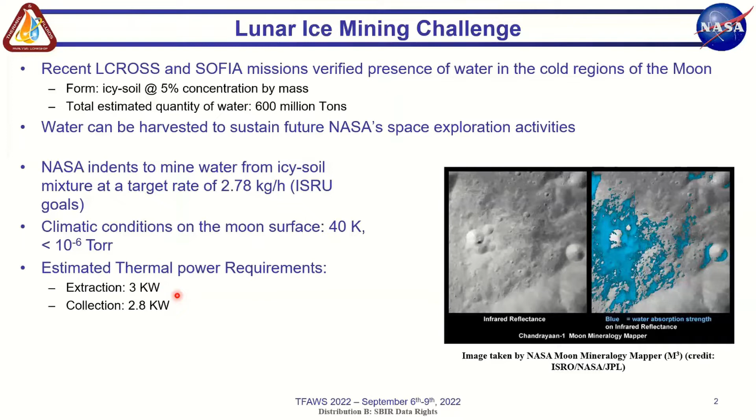And for collection, we basically have to recondense the vapor back into ice on the collection side. So we'll have to reject 2.8 kilowatts of power there. So we are working with our collaborators, Honeybee Robotics, in developing this entire thermal management system for volatile extraction and collection. So volatile here in this particular project is basically ice.

So here you see with this particular flow process, different thermal management components, which will be assembled together for the final test. So we have the mechanical pumped fluid loop, single phase in nature. It connects the waste heat source like an MMRTG and delivers heat to one of the main components, which is the thermal corer. And the entire presentation is actually around the thermal corer here. So the thermal corer is basically used for ice extraction.

It basically has mini channels on the drill auger. And we have a rotary union, which facilitates the fluid loop between a stationary component here and a rotating component like the corer. And later on, we'll be developing a VCHP integrated cold trap tank, and that's basically for the volatile ice collection, so to speak.

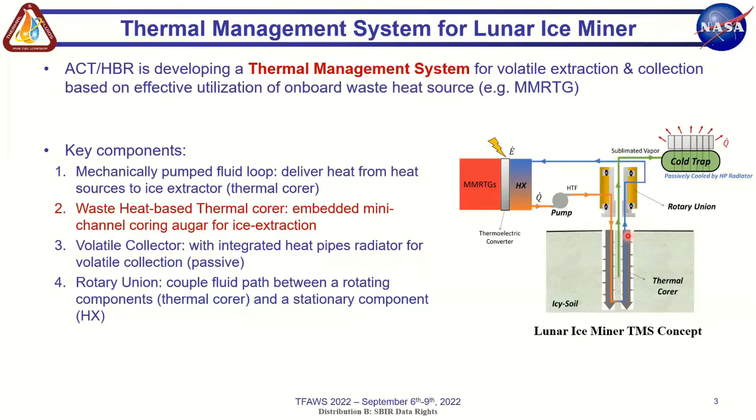So this is just a schematic representation of how we would envision the entire thermal management system to be on a vehicle here. So we have the corers here, power source connected to the battery. So this is our electrical supply, and then we have the VCHP radiator panels for heat rejection to the sky, by radiation, basically.

And so for one particular vehicle, we have some preliminary calculations, which were done in phase 1. So we're looking at 60 kgs of entire system weight, including the batteries and the power source, 0.33 kilograms per hour of ice mining rate, and then we have this particular thermal and electrical energy demand.

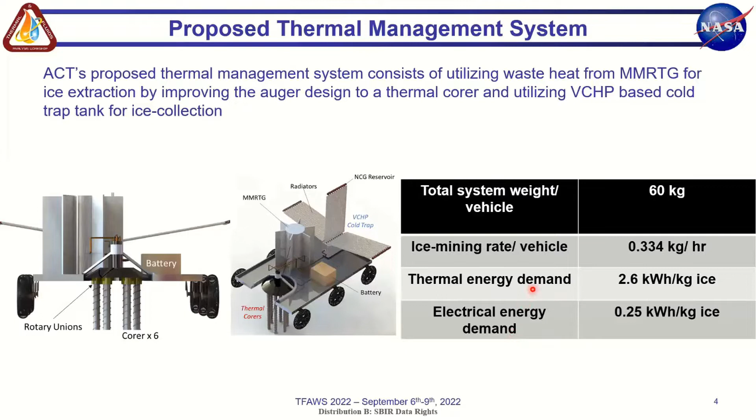So we'll come to the crux of this presentation, which is looking at the thermal corer for ice extraction. The thermal corer is an improvement on the PVEx drill. The PVEx drill was the original concept, which was developed by our collaborators, Honeybee Robotics, for ice extraction. So just for the sake of convention, I'll call the PVEx drill a standard corer here, which is this particular figure. So you have a drill auger with an internal capture volume.

So the water ice regolith, which fills this capture volume, is heated up, and that's where the sublimation occurs, and the sublimated vapor is captured. So a standard prototype, which was demonstrated, and which we will consider for the sake of this presentation as the state of the art, is about 5 centimeters in ID and 50 centimeters long. And so it has 1000 cc of internal capture volume.

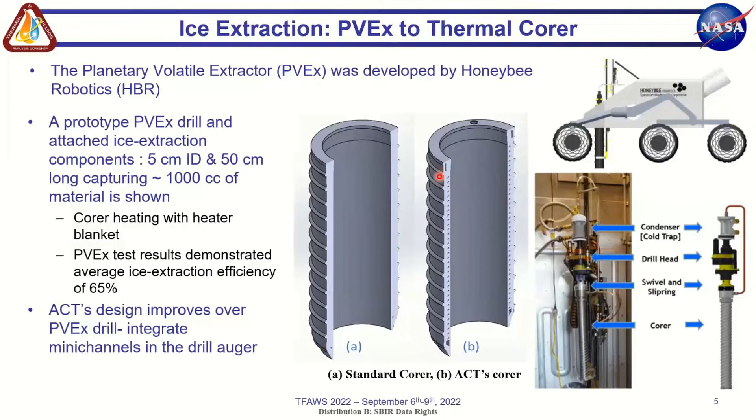And in their experiments, they actually used a heater blanket for sublimation, and saw up to 65% ice extraction efficiency. So where our innovation comes into the picture is basically integrating mini channels into the standard corer, and we'll call this the thermal corer here.

So the thermal corer with mini channels for fluid flow for ice extraction. We'll have the hot fluid inlet and the cold fluid outlet at the top of the manifold. The hot fluid coming in distributes into four channels, separated out, and spirals downwards. It converges at the bottom manifold and then flows through the annular space outside and then flows outwards from the top of the manifold again.

So here's a schematic, this is the thermal corer that was 3D printed. This one is 5 centimeter ID, but 17 centimeter for the demonstration purposes. Another schematic laying out the same, the hot fluid representation in red. We'll have the hot fluid flowing close to the inside captured volume, because we want the majority of the heat transfer occurring to the inside of the corer for the sublimation of regolith.

And so the hot channels, you see the channel size increases in aspect ratio as it flows down. And then at the bottom, it finally converges, and then it flows outwards. The cold fluid flows outwards, more closer to the outside of the corer. And then we have the cold fluid flowing outwards completely.

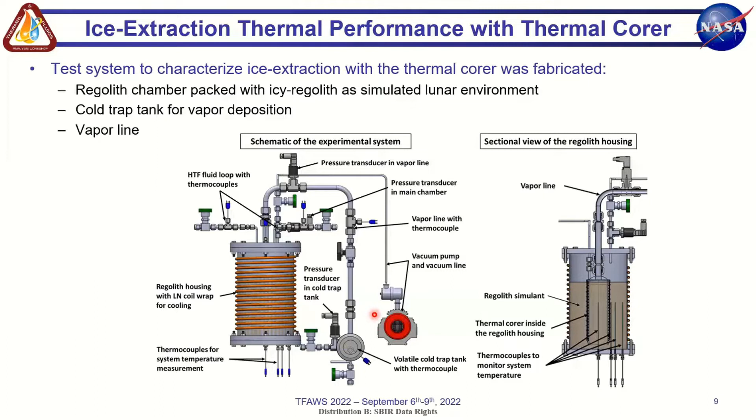So a couple of sets of experiments we did. We basically are maintaining the initial and the cold wall on the regolith chamber at minus 20 degrees C, and we are pulling down the vacuum to around 10^-3 torr. The cold trap tank we are maintaining at a touch lower temperature, at minus 50 C, just to have that ice deposition happening there.

So one set of experiments where we have heat transfer fluid at 50 degrees C. We are using ethylene glycol 60% volume as the heat transfer fluid. And the reason is we don't want the residual fluid in the thermal core to freeze when we are cooling down the whole system to minus 20 C or below. So in this case, we have about 25% of ice extraction.

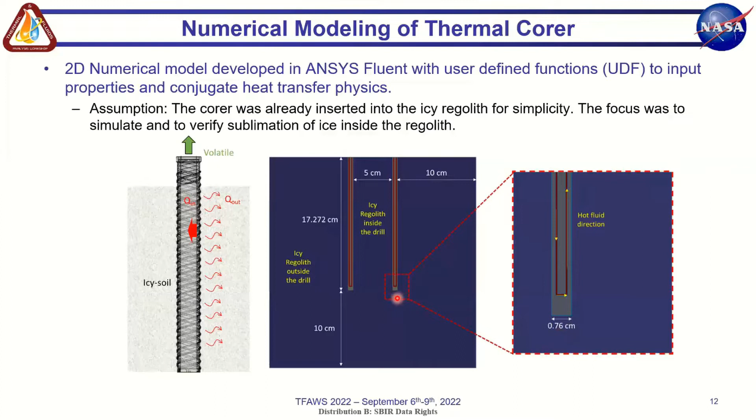As the hot fluid flows through the mini channels in the thermal core, we start increasing the temperature of the regolith, which is captured inside. And that changes the saturation pressure of the fluid, which is water in our case. And that also changes properties like the specific heat and the thermal conductivity, which are a function of the ice fraction available, the temperature, local pressure, porosity, etc.

And so we are essentially solving the entire energy and fluid flow equation from the heat transfer fluid to finally determine the temperature distribution and ice mass fraction left in the captured volume. The essential difference between the initial and the final fraction left will be the amount of ice that is extracted. Other internal calculations will be the specific heat capacity of the regolith and the thermal conductivity of the mixture.

So some initial conditions we had with the numerical model: we had a mean fluid temperature of 42 degrees C, which was essentially the average temperature of the fluid going into the thermal core. And a back pressure of 3000 pascals, which is the resisting average pressure from the cold trap tank, which we actually observed during the experiments.

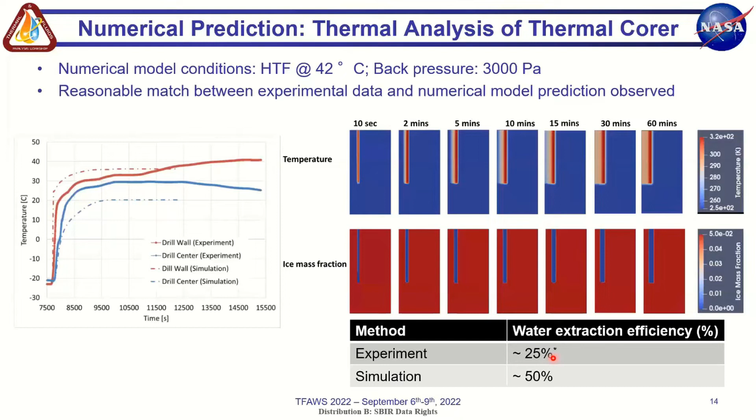And the reason why I say more than 55% is we noticed that there is some amount of residual water which we were not able to extract when we were putting it in the measuring flask. So we're still figuring out ways to capture the entire volume for a clearer number.

And the other aspect here is, initially when we insert the corer in the pre-packed sand, we're going with the assumption that the sand flows without any resistance into the thermal corer volume. But again, we want to do some simple experiments to see if we are actually filling the entire volume inside the corer, or if there is a small fraction of space that is still left in the corer.

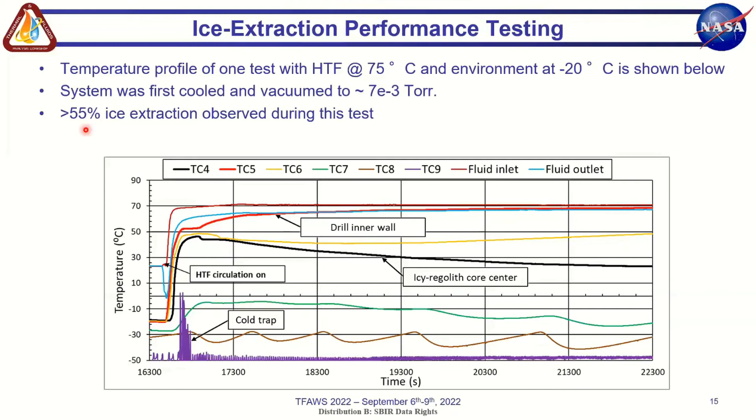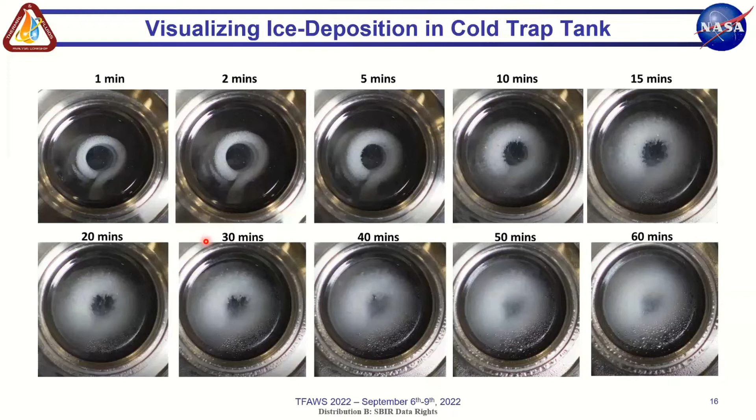So going forward, we are still doing more tests to find the optimum parameters for this particular prototype, and then have the numerical model come in handy so that we can use it to find the more optimum geometry and the optimum operating parameters for ice extraction here.

Soon we'll be delving into the VCHP radiator cold trap tank. We already have good experience with the VCHP radiators, and with the cold trap tank we have a good amount of information from this particular test with the proxy cold trap tank. So we are quite comfortable finishing this effort quickly. And then soon we'll be integrating the entire system with a mechanical pump loop design.

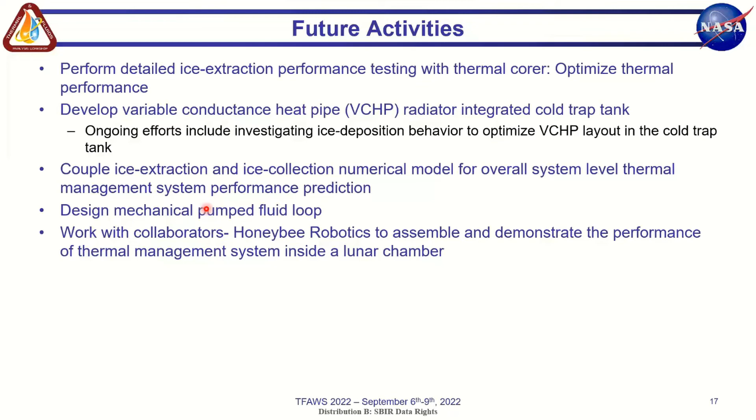Also on the numerical side, we'll soon be coupling the numerical models for the ice extraction and the collection model. We are right now developing the ice collection numerical model. And soon we'll be working with the collaborators to demonstrate the entire assembly to see the ice extraction and ice collection performance in the entire thermal management system. So that brings me to the end of this presentation.

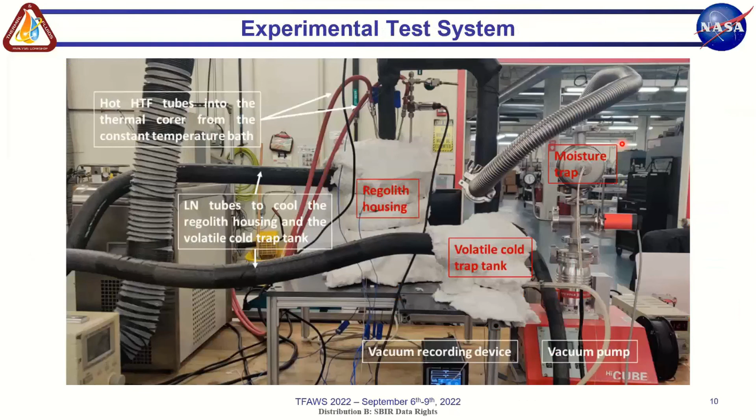The coring design has the threads on the auger on the outside rather than the inside where you're actually collecting the fluid. Is there a specific reason for that, or did you want to see if you could put some kind of geometry on the inside to maybe transfer heat to the regolith better?

Is that right? Yeah, so inside we basically did not want to tamper with the original design with the PVEx drill, but certainly that can be one form of enhancement we are considering going forward. Another aspect would be having some sort of fin structures, because one of our discussions with the technology directorate would be to expand on the diameter to capture more regolith inside. And so there will be an interplay of how much capacitance there is, the length to diameter ratio, and we are actually looking at those structural changes going forward.

You heard about that. Okay, cool. Excellent. Thank you. We did have another question here. Is there much heat transfer between the hot fluid moving downward and the cold fluid moving upward, or are you able to thermally isolate these fluid paths from one another?

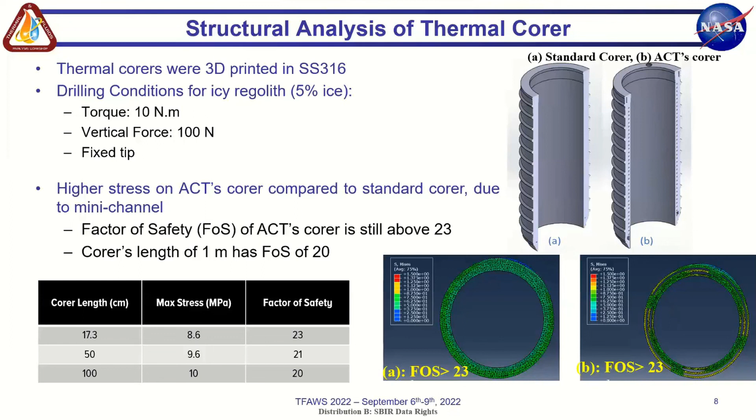So initially, what we believe could be happening is we have a strong heat transfer, which is why we see a higher temperature on the wall than at the center on the axial side. So as this portion dries out, the drier regolith has a poorer thermal conductivity, which could be leading to poor heat diffusion as we proceed in time. And that is where the thermal conductivity of the regolith comes into the picture. But along with the thermal conductivity, there are other factors which will influence the

sublimation rate. Let's say as the pressure and temperature go above the triple point, that's where we have liquid to vapor transition happening. So more heat needs to be put in than for sublimation itself because of the latent heat changes there. And we also have the influencing back pressure, because there is a resisting force from the cold trap tank as we fill up the volume there with new incoming vapor, and the pressure is increasing. So we have all these factors at play here.

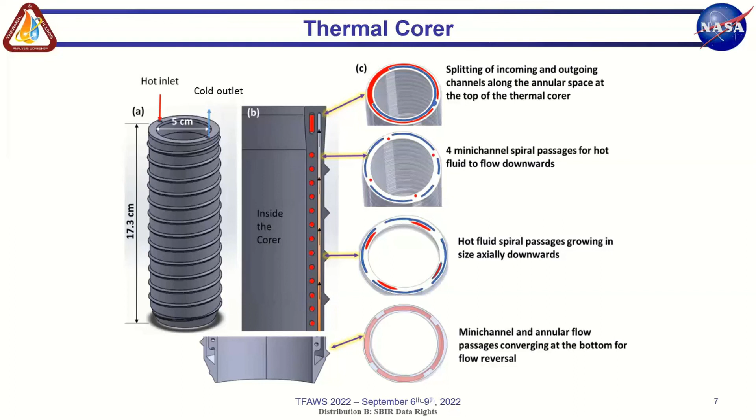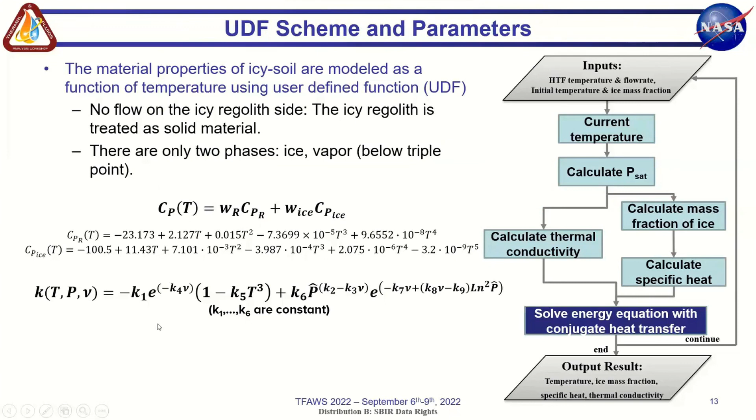Pick up the chat. So if they're interested, here's this correlation we have where the thermal conductivity is linked to temperature, velocity of the mixture and the regolith itself. And this is taken from the literature.